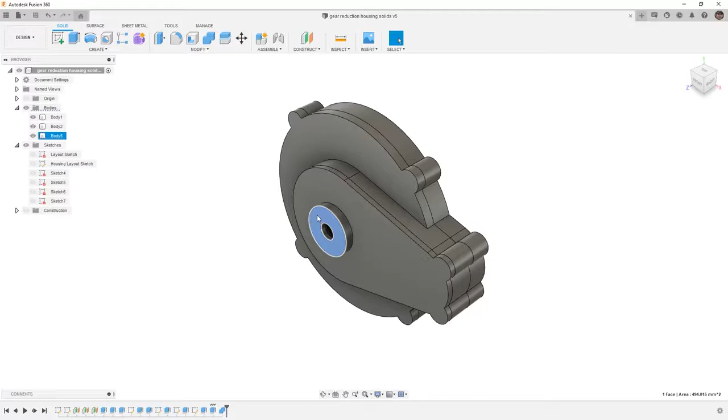To get started, I want to begin by selecting the end of this bearing face that we created, right-clicking, and starting a new 2D sketch. When we start a new sketch, in the sketch palette on the right-hand side, you'll notice that we have something called 3D Sketch. Depending on your user preference settings, 3D Sketch may automatically be on or off in your sketch palette. If it's off, let's go ahead and turn it on now and talk about 3D sketching.

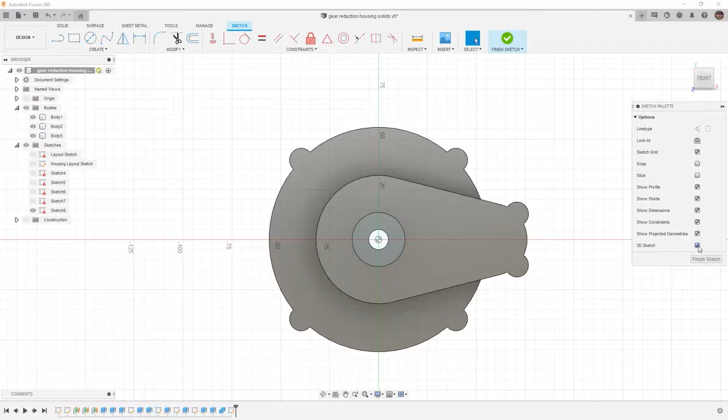I'm going to rotate my model a little bit, and I'm going to begin by going to my Create dropdown and taking a look at Project and Include. We've already used Project to bring sketch entities into another sketch, but we can also use it to bring faces and edges from other solid bodies into our current sketch.

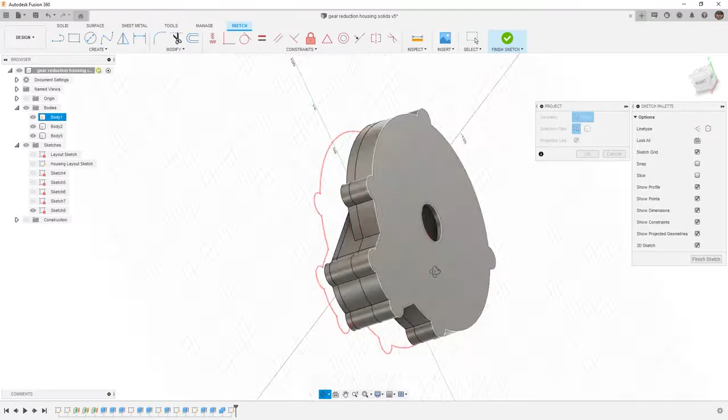For example, if we select Project and we grab this entire face, it's going to grab the internal and external edges that belong to that face. The same thing if we grab one of the other ones. You can see the preview on the screen in red showing us exactly what's going to be created. If we rotate the part around and select the back face, notice that it's giving us everything that's included with that face. What I want to do in this case is select this front face and project that onto my current sketch plane. Also note that we can use the bodies option or specified entities.

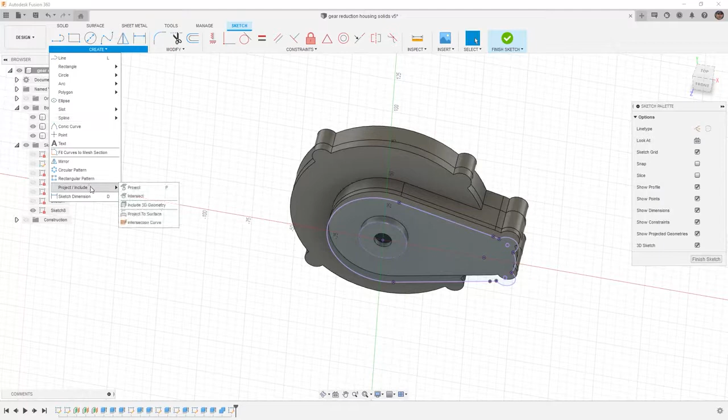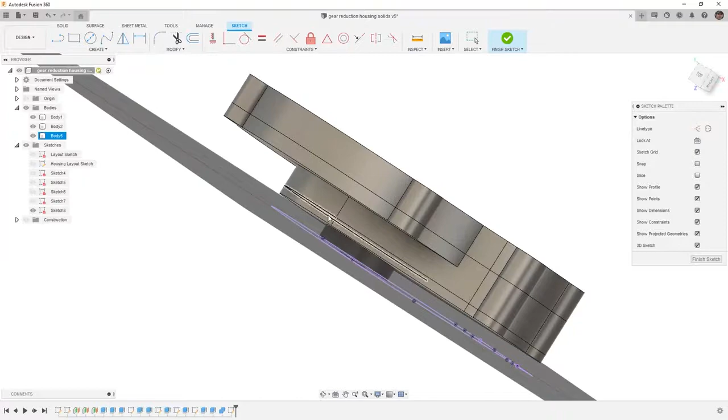When I say OK, I now have these purple sketch entities that have been projected. Let's go ahead and view Project Include again, and let's take a look at the next option, in this case, Include 3D Geometry. We're going to select Include 3D Geometry, and we're going to select the same geometry we just used to project. But notice that it's not giving us the same face selection and the same preview. What it's actually doing is it's grabbing entire faces or edges, and it's going to be including them in 3D.

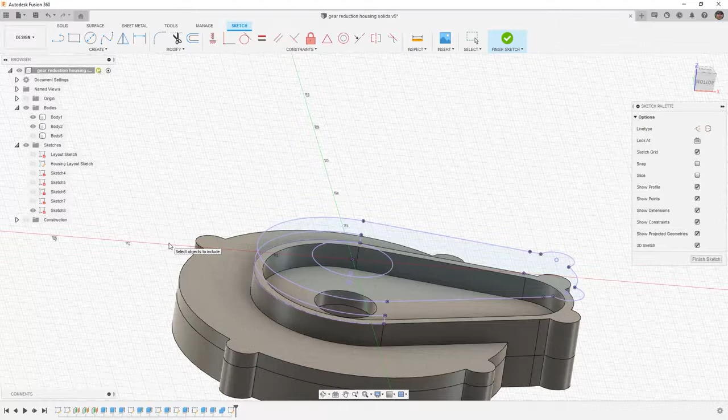For example, if I select this arc or this face, notice that what I'm actually doing is I'm getting those entities in my 3D sketch. So it's not bringing them to my 2D sketch plane, however, it is including them and keeping them as a 3D element. Let's bring back Body 5 and let's go back to our Create dropdown, and in Project Include, we can see that we have other options such as Project To Surface and Intersection Curve.

We also have an option for Intersect, which will allow us to grab the intersection on our current sketch plane. To view that, let's finish this current sketch and let's start a new sketch on this face.

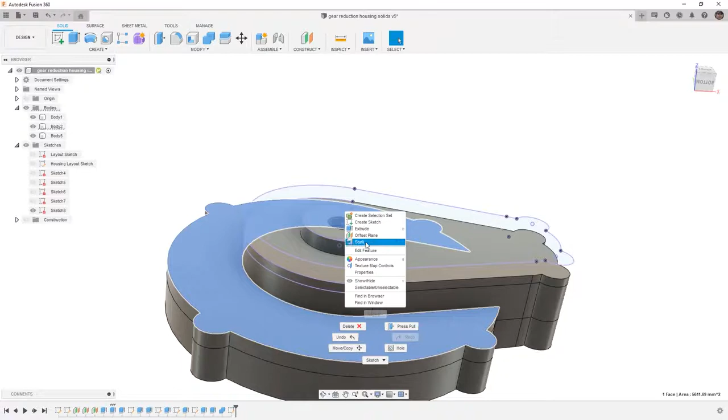When we create a sketch on this face and we go to our Create, Project Include, and Intersect, we can select a face that doesn't have a sketch entity on it, and using the current sketch plane, we can create those entities based on the intersection with our selected sketch plane.

This can be a face on a body as long as it's planar, or it could be a specific plane. Now, in this case, we also have those exact same entities that we could project from the top or the bottom. But that doesn't always happen. If you have a drafted body or something with some curvature, you might need to use the Intersect option.

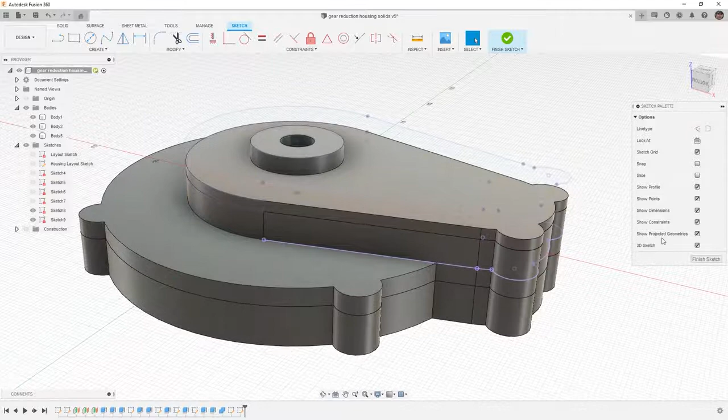While we are here talking about Intersect, there is another option in the sketch palette called Slice that'll create a temporary section view. This doesn't create the edges for you, but it allows you to cut through the solid geometry so that way you can see exactly what's on the current sketch plane. This can be extremely handy as you need to work inside or outside of certain geometry. It can be problematic to see through the solids, so using that slice option can be extremely helpful.

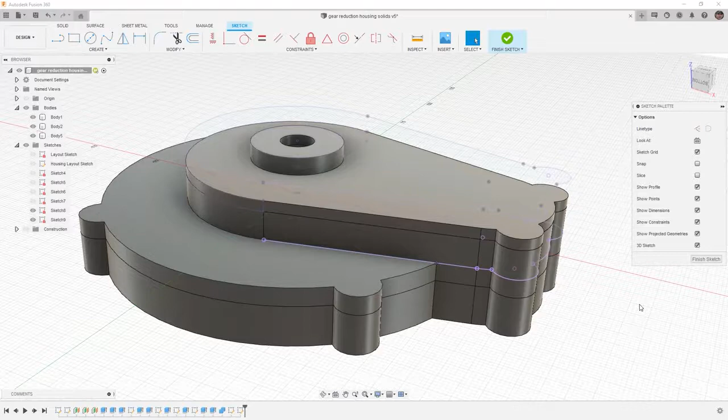The next thing that I do want to talk about with 3D sketching before we turn that off is actually creating sketch entities. Using our line tool, you'll notice that we have a different coordinate system display because we are using 3D sketching. I can begin sketching in 2D, but I can also switch to different planes.

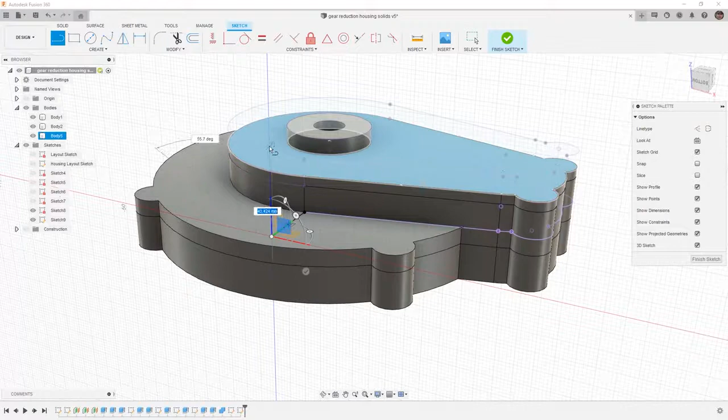For example, I'm now sketching in the Z direction, and I can switch again to the XY, and I can begin working in XY, and snapping to those various coordinate systems. I can then move into the YZ plane and I can come back down. I can also snap to geometry in 3D.

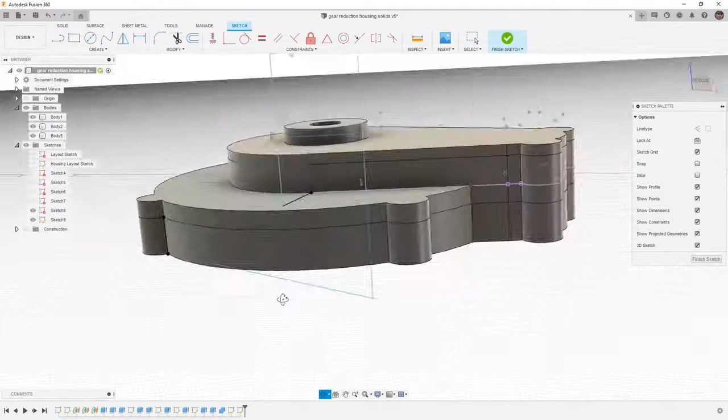I'm going to hit escape and notice that we now created some sketch entities that are actually in 3D by using those options. So it is important to note that 3D sketching is available and you can do things like project or include 3D entities, but you can also create them on the fly as long as you turn that option on.

Let's go ahead and turn 3D Sketch off, finish the sketch, and we want to close this file without saving. It's important to play around with all these tools, but for our specific design, using those options for 3D sketching are not going to provide us any benefit, but it is important that we play and understand what they do before we move on.

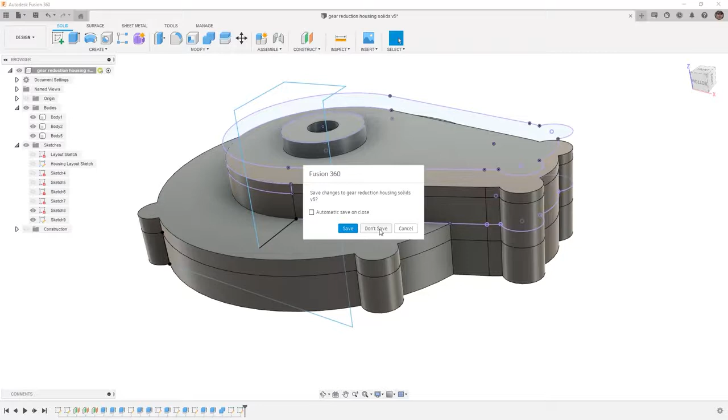So I'm not going to save this, but I am going to continue on with that same design in the next video.